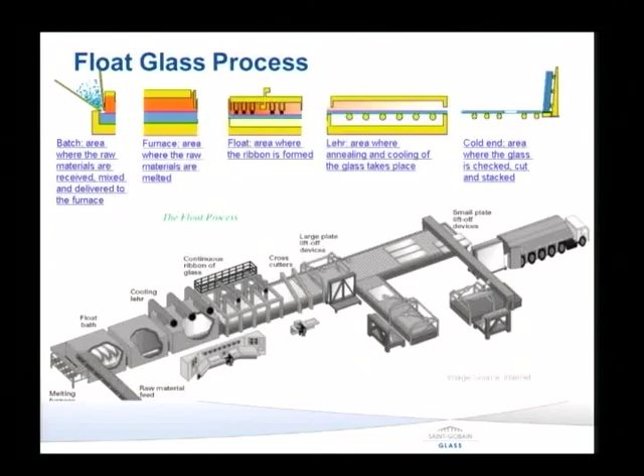The glass is floated over molten tin and a ribbon is formed because of the difference in densities. This ribbon is moved on to rollers in the annealing lehr. The annealing lehr is extremely long and can be as long as 400 meters. This is where the slow controlled cooling of the glass takes place. It begins at 600 degrees at the beginning of the lehr and goes down to 40 degrees centigrade. This moves on to the cold end, where the glass is cut, optimized, and then stacked.

Just about the raw materials that go into the manufacture of glass. Glass is fascinating as it uses more of earth materials, most of which is sand. Sand brings in silica, which is found up to 95 to 99% in normal occurring sand. Its melting temperature is 1750 degrees. The other raw materials are limestone, dolomite, soda ash, sodium sulfate, and coke.

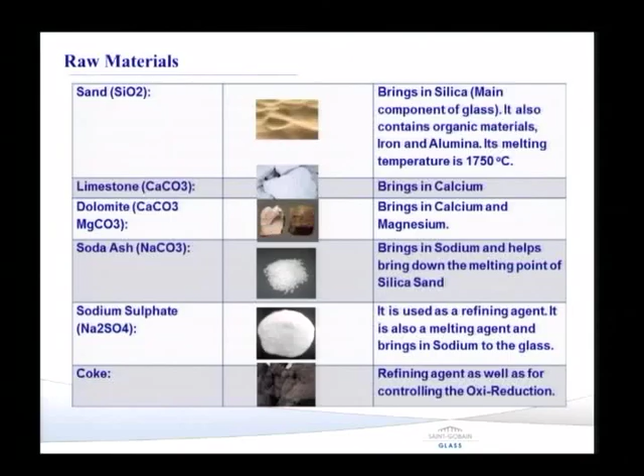Some of these are used as fluxes, and some are used as refining agents. These bring about calcium, magnesium, sodium, and carry out the oxy-reduction reaction in the furnace. You can understand this better if you look at the final composition of glass, which contains silica, calcium oxide, sodium oxide, alumina, magnesium, and potassium oxide in their respective compositions. Glass is a unique material which has the structure observed in a supercooled liquid, but exhibits the mechanical properties of a solid. More on these mechanical properties would be explained during the design of glass.

Why do we use glass in buildings? Why do we see glass everywhere today? Let's have a look at that now.

Glass has become indispensable to modern architecture. Why? One, it saves time. Glass is much faster in construction. You can do an area of 150 square meters in a single day.

It's a lighter material, so it saves resources, a sum of 1,300, which includes, for every 15 floors, about 500 in the brick material and the remaining 800 in the foundation removal and additions. So this saves resources. It's energy efficient.

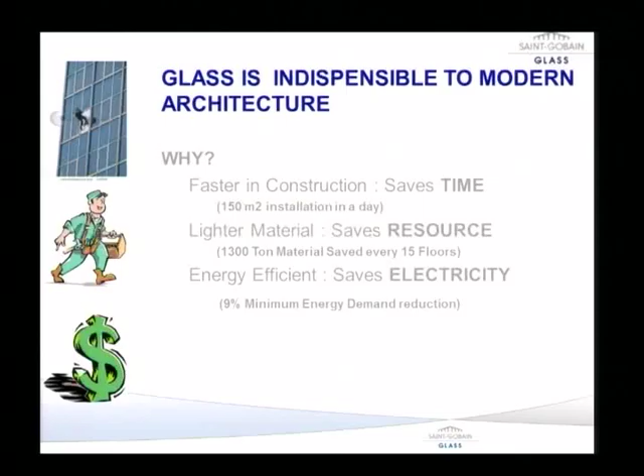A 9% minimum energy demand reduction is observed between buildings which use glass and those which do not use glass. Now this can go up to as much as 50% or even higher if you use glass effectively and carefully. We will touch upon this especially in the coming slides in this lecture.

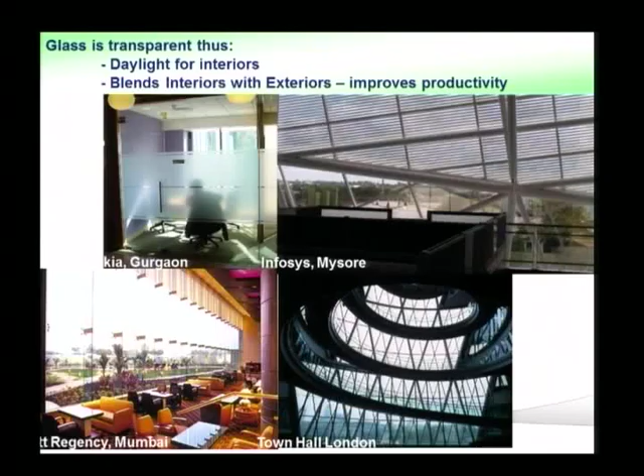Another unique property of glass is that it's transparent. It brings in daylight to the interiors and blends the interiors with the exteriors. This has also been seen to improve productivity as compared to the claustrophobic effect you get without windows. No other building material can effectively do this while being fully transparent as glass with such a high light transmission.

Just to show you some examples of buildings which combine natural and artificial lighting in these slides. And in the next slides, buildings which use only natural daylight through effective daylighting devices, as the picture you see on the right, and completely glazed windows which allow light inside but reject the heat transfer between the window.

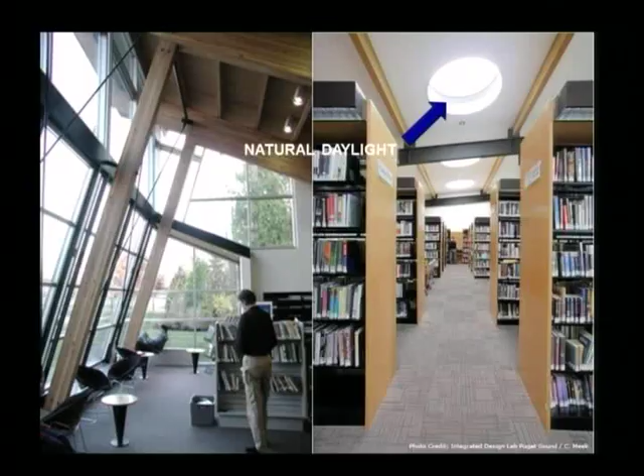Apart from that, glass is also recyclable, most of which is used in the manufacturing process itself and can be reused in the annealed condition, where it can be cut and reused again, or as full windows.

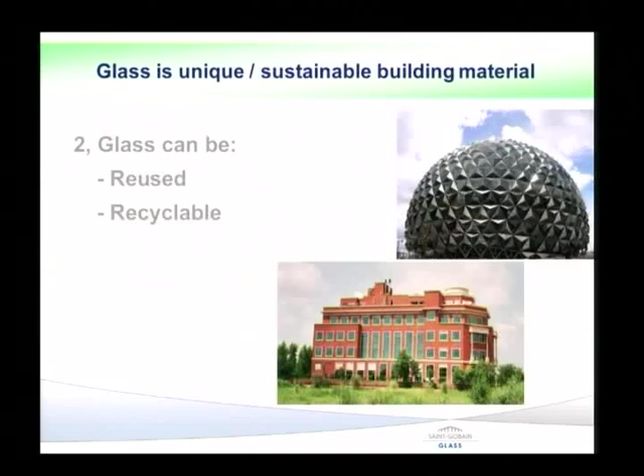Architecture. Let's see how glass plays a role in today's architecture, how glass has evolved over the days. If we look at modern architecture, you can divide them into generations.

In the first generation, windows were smaller, what we call punch windows, and glazing wasn't extensive. You move on to the second generation, the skyscrapers used fully glazed facades, wherein the entire character of the building was known through the glass.

In the third generation, transparency became more important, and glass was seen as a material that could give a sense of openness. The fourth generation was more about form, using the form of the building to actually provide function in terms of passive design in architecture.

The fifth generation, what we are moving towards, is communicating through the entire facade through glass, wherein you can actually use the glass to provide a function apart from its standard functions of transparency, heat reduction, and structural support. Let me show you some examples of the fifth generation, because this can be quite interesting.

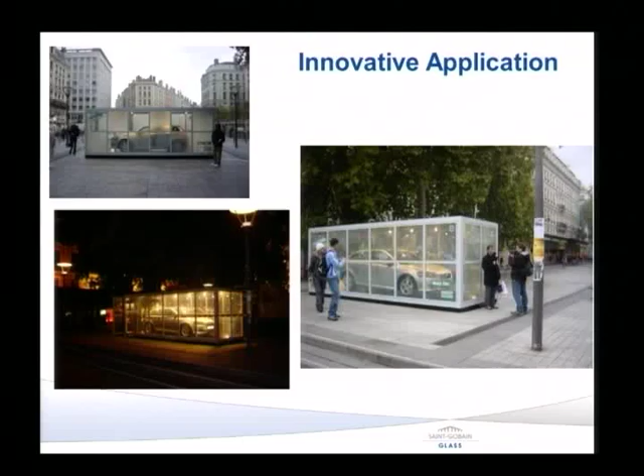Moving back, this is as forward as we can go in terms of using glass in buildings. Let's jump down to the basics. How do we use glass in buildings?

Basic glass can be clear, tinted or coated. A tinted glass runs a color through the thickness of the glass by adding colorants to the raw materials in the furnace, so you can get different colors through the thickness of the glass itself.

A further value addition is coating the glass. These form the base glass, which are further processed after being cut to size and made ready to go into the building as tempered, laminated, bent or curved.

There can be other decorative value additions done in this phase, such as a ceramic fret design on the glass, acid etching, or frosting. The applications are various and you would see these in day-to-day life.

The glass is transformed and made ready to go into the building, either as single glass units or insulated glass units. Insulated glass units are usually two or more glasses combined with a spacer and made into a single unit. This provides several benefits such as thermal insulation, acoustic insulation, etc.

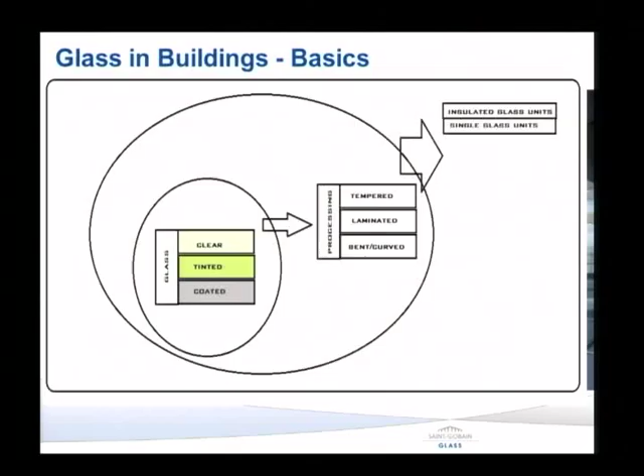Let's see the properties of glass. Glass has a very high compressive strength of almost 1000 megapascals. What it loses in tensile strength, it makes up in compressive strength. The tensile strength of glass is 40 megapascals, but can be improved by heat treatment.

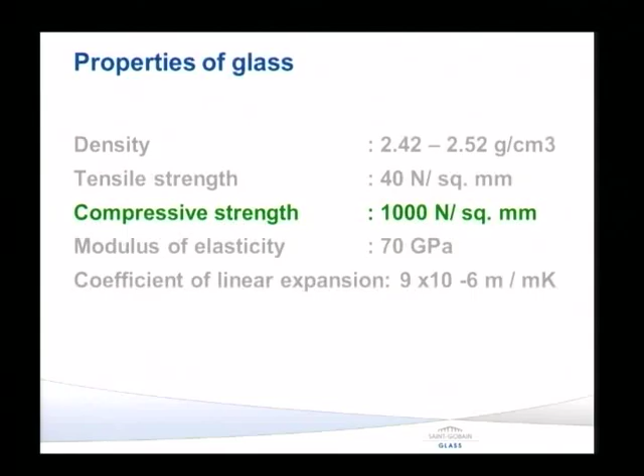This can be done by a process called tempering, which we will see in the coming slides. The glass itself can be improved from 40 to about 120 megapascals.

There are several ways of using glass. Let's look at two of the most common. One, it's used as an infill material where the role is to allow vision, and the glass carries the load and transfers it onto the structural members such as the frame.

This uses the plate and beam theory, like a slab, where the glass can be used even for flooring, for canopies, roofs, skylights, etc.

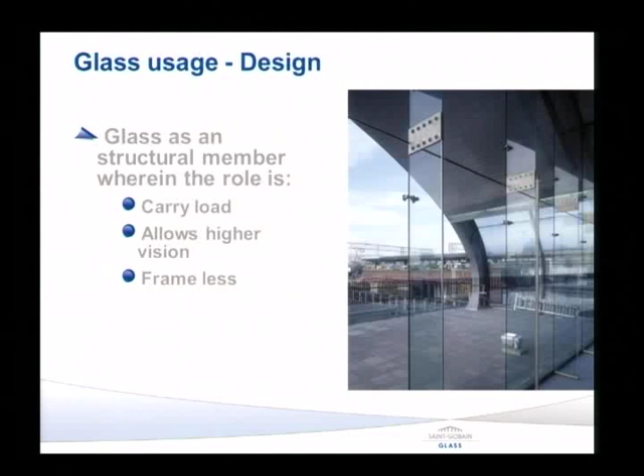The second is where the glass itself is a structural member. The glass carries the load and gives the illusion of being frameless because glass is transparent. You see this becoming more and more common today. Normally, we use finite element analysis to study this as a structural member.

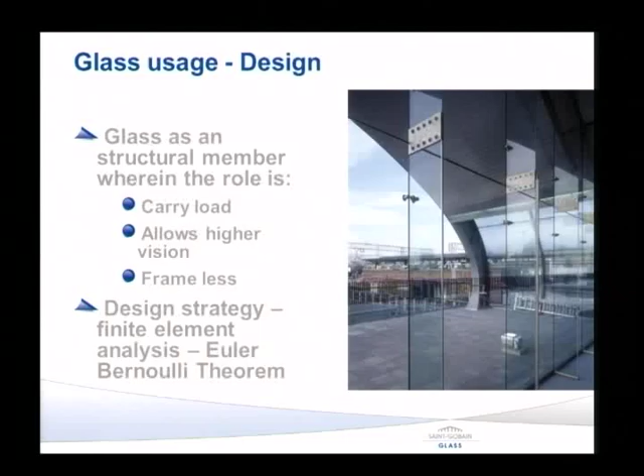Sustainability. How can glass be used as a sustainable material? Why do we see more and more buildings that are energy efficient claiming to use glass to actually reduce their energy consumption? This is quite interesting. Let's see how.

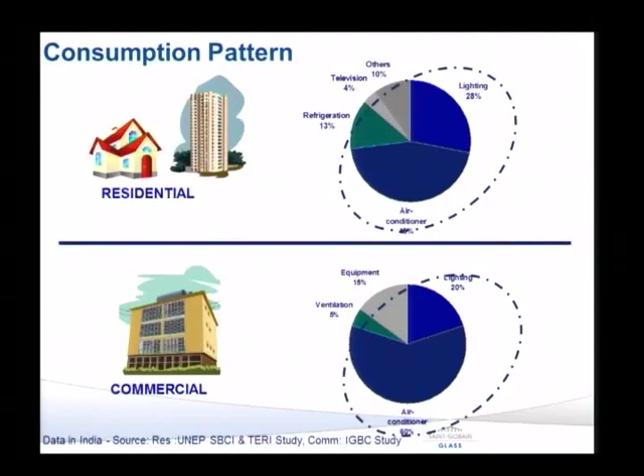If you look at total electricity consumption, about 30% of all electricity is consumed by buildings in most countries. Within buildings, you have residential and commercial broadly. Most of the electricity consumption comes from air conditioning and lighting, about 80% in both residential and commercial buildings.

Both of these are directly affected by the glass. Glass allows light and can reduce the amount of artificial lighting used in the building. Most of the heat load on the air conditioner comes from solar heat gains through the glass, which again can be controlled by choosing the right type of glass.

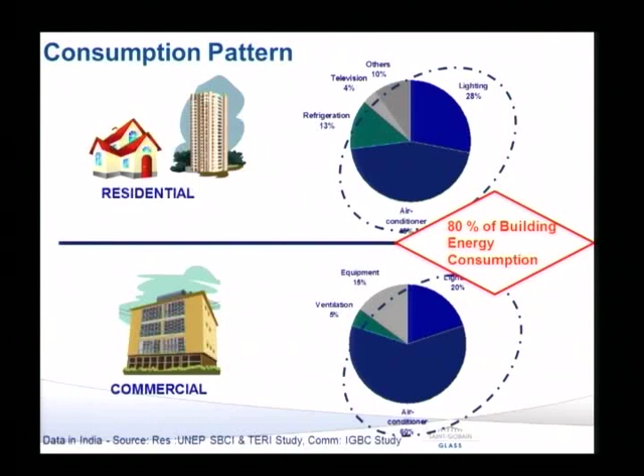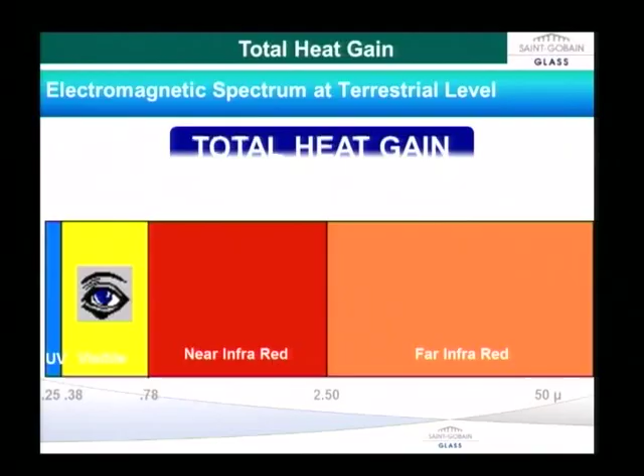It's important to understand the electromagnetic spectrum to see how heat enters through the glass. The useful part of the wavelength is between 380 to 780 nanometers - this is the visible part of the spectrum. This is what we want to cause vision, and we want this to enter the building.

Now, the near infrared and the far infrared are heat-causing radiation. Most of the near infrared comes directly from solar radiation. The far infrared comes from heated objects and surroundings outside the building, which are then transferred through the glass into the building.

There's also the ultraviolet part of the spectrum, which can cause fading of furniture, curtains, etc. in the interiors, and is also known to be carcinogenic or cancer causing. So of the total electromagnetic spectrum, the part that we want is only the visible part of the spectrum.

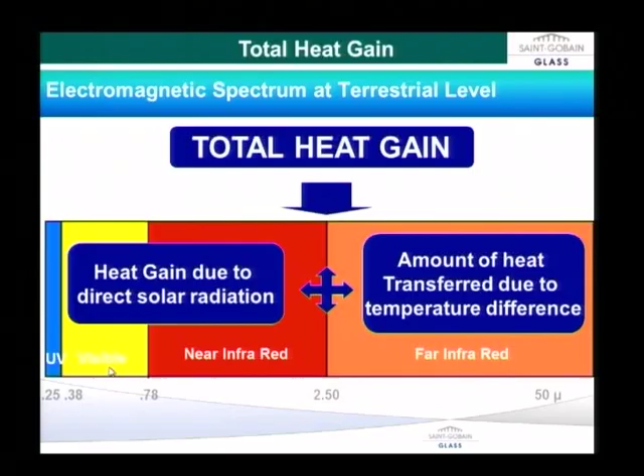To understand thermal transmission better, it's important to understand the parameter of U value. What is U value? It is basically a coefficient of heat transfer. It is the amount of heat transferred due to the temperature difference on the two sides of the glass. How do we define U value?

If you take a glass of 1 square meter, for a 1 degree difference in temperature, this could be 21 outside, 20 inside, how much heat actually enters the building? How many watts of heat comes through the building? So let's say, for example, it's 30 degrees outside and 20 degrees inside. So your U value will give you the amount of heat coming inside.

Can we just stop here and shall I explain it on the board? Because it can be written down quickly. Yeah? Where's the... and I think I need to wipe my face. No? Any chalk?

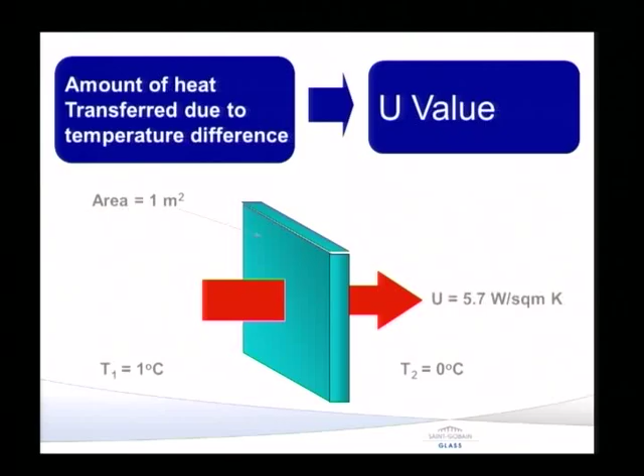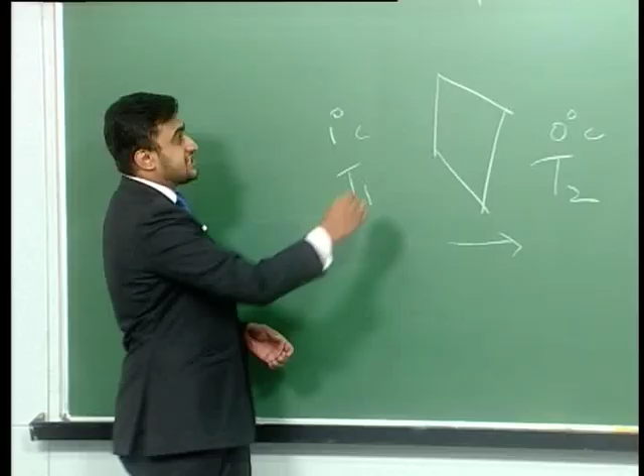The U value of glass, just to explain to you better on a board. If this is a panel of glass and you have two different temperatures on the exterior and the interior, the amount of heat transfer that occurs through the glass can be defined by your U value. So if you have a 1 degree difference in temperature for a 6 mm glass, about 5.7 watts pass through the glass.

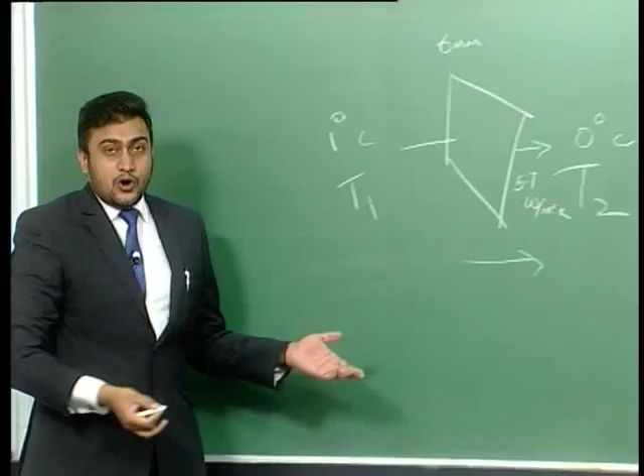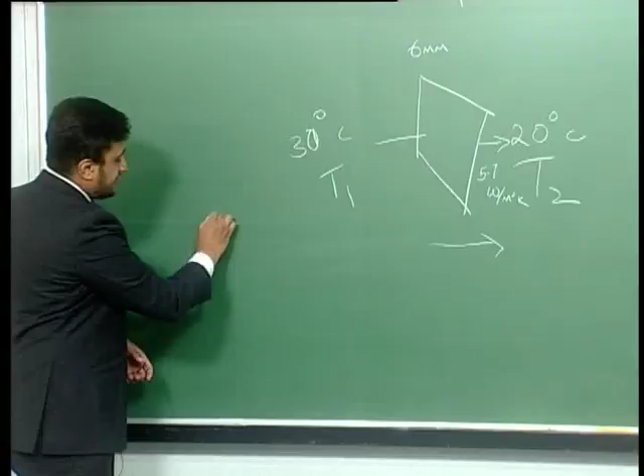Now let's say you have a temperature difference of 10 degrees. The amount of heat transfer is given by the equation for the heat transfer. So you have the area, it's 1 square meter, the temperature difference is 10 degrees delta, and the U value of 5.7. So you get 57 watts. Now this can be reduced by different measures. One is by doing a coating on the glass, we'll see how later.

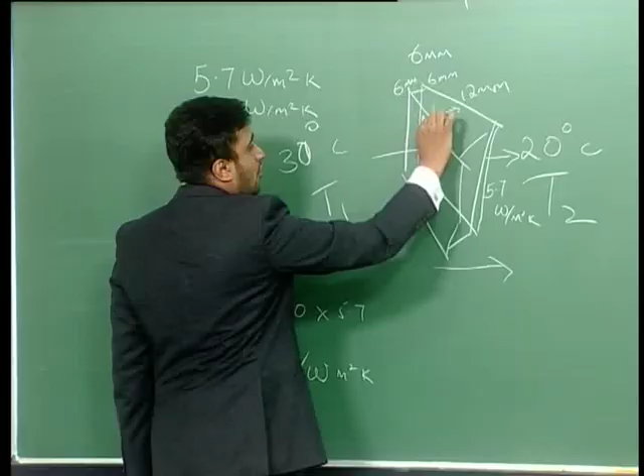Another is by making the glass into a double glazed unit. So you have an air gap of 12 mm and you have 2 panes of glass. A 6 mm glass would reduce from 5.7 watts per square meter Kelvin to 2.8 watts per square meter Kelvin just by using a double glazing. This can be further improved by doing a coating on the glass. Once a low emissive coating is done, this can go down to 1.5 watts per square meter Kelvin.

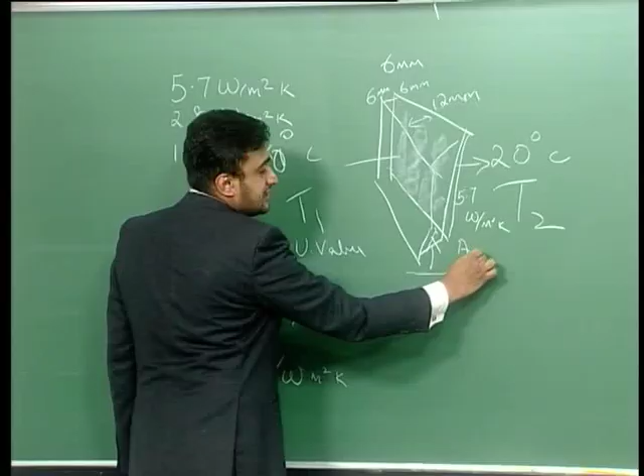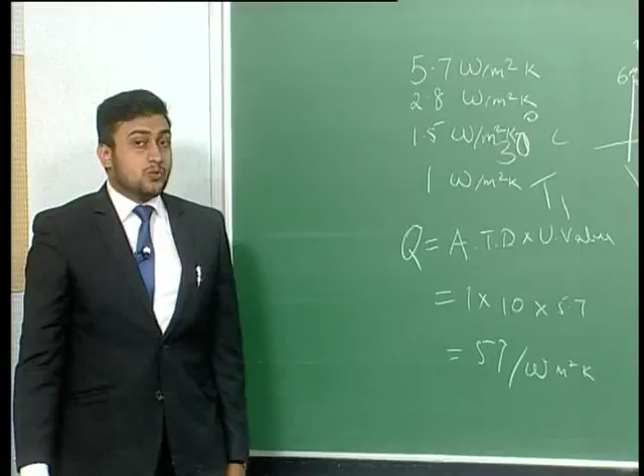This can be further improved by replacing the air inside with an inert gas such as argon, which would further improve it to about 1 watt per square meter Kelvin. Now in this case the 57, if you had used this, would come down to 10 watts.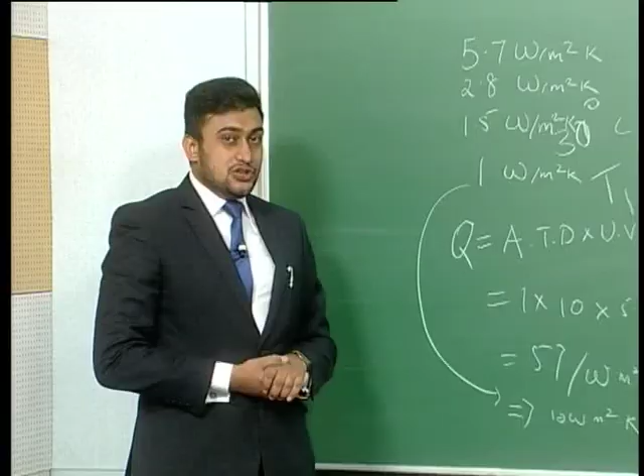Now this is very important in cold climates where people use heat to actually heat up the interiors, and you don't want that heat to be transferred outside. So let's say it's 25 degrees inside and 0 degrees outside, you have a 25 degree difference in temperature. So most of the heat generated would be lost if the U value of glass is very high. So it's very important to use a low U value glass in colder climates.

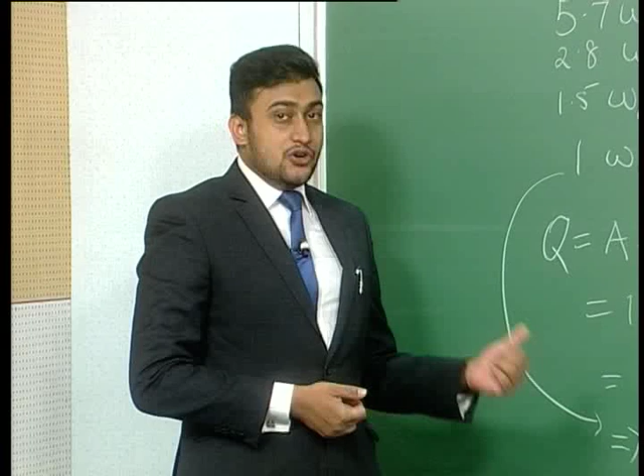In a very hot climate where the temperature can go up to 40 or 45 degrees during the day, the U value again becomes important. But if you look at a region like India, most parts of India at least, most of the heat gain is through solar heat gain; the amount of heat that is transferred directly through radiation is much higher. Let's look at that now.

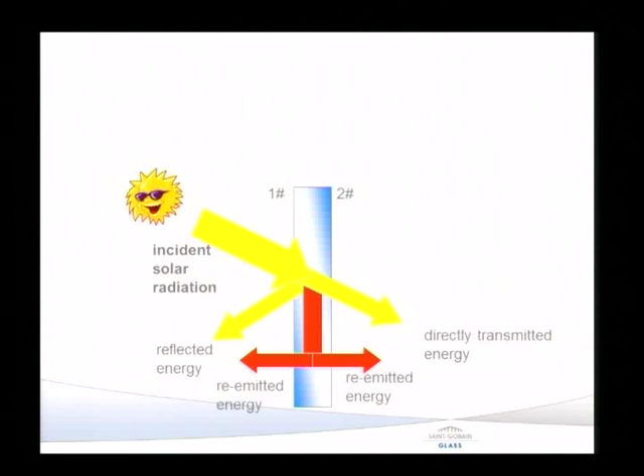So how does heat enter through a glass? From the incident solar radiation, a part of the heat causing radiation is directly transmitted through the glass itself. A part of it is reflected, a portion is absorbed by the glass, of which one part is re-emitted inside and a part is re-emitted outside. Now the part which concerns the performance of the building is that which comes inside the building.

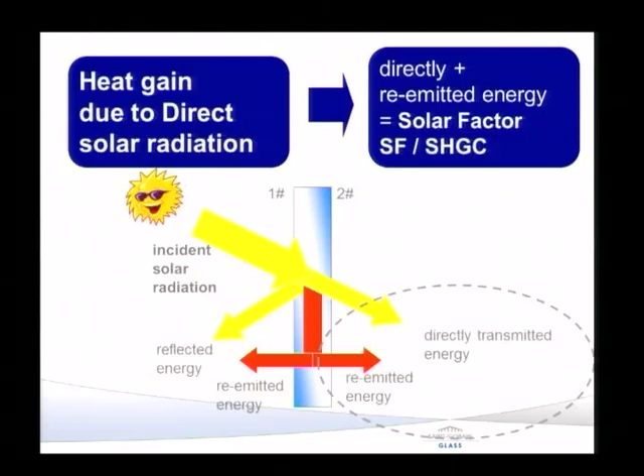So your solar factor, the performance parameter which tells you how much solar radiation is coming in, is the directly transmitted energy and the re-emitted energy compared to the amount of incident solar radiation. In some countries, this is also referred to as a G value. Let's see how this affects a building.

Consider an average summer day where it's 38 degrees outside and 23 degrees inside, a temperature differential of 15 degrees. The solar incident energy at around noon is about 630 watts per square meter. This can go much higher. Let's consider a clear glass with a solar factor of 0.83 and a U value of 5.8.

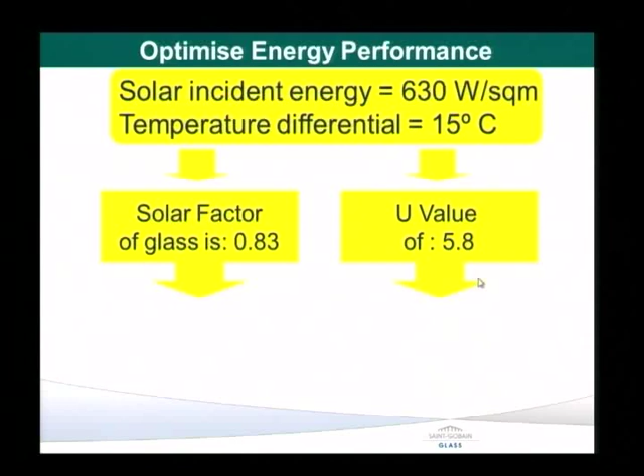Now the amount of heat coming in through radiation would be the solar factor into the solar incident energy. That's 0.83 multiplied by 630 watts, which is 523 watts. The U value into the temperature differential gives you the amount of heat that comes in because of the temperature differential. Now what can be controlled more easily is of course the solar incident radiation by using a solar control glass. So in a tropical country, a majority portion of the heat comes from solar incident energy and needs to

be controlled. Now say we used a glass with a solar factor of 0.5 instead of the 0.83. The amount of heat coming in would have been 315 watts and the total heat gain would have been less than 400 watts. Say we used an even lower solar factor of 0.2. The total heat coming through the glass would be further reduced to 126 watts and the total heat gain would be much lesser at approximately 200 watts per square meter. So it's easier to control the performance in a tropical country by controlling the solar factor of the glass.

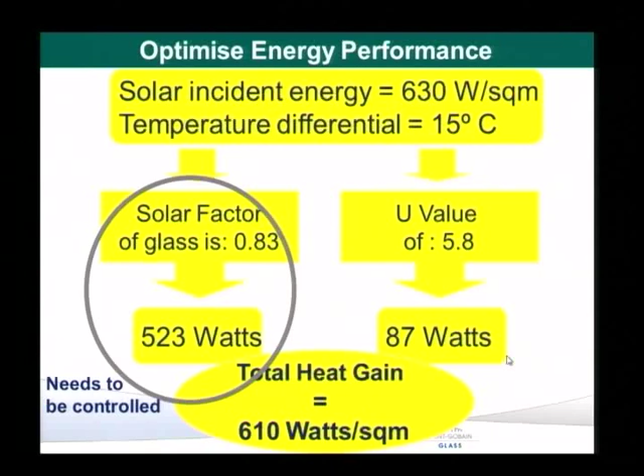Moving on to the other parameter of glass, light transmission. Now this is a desirable quality to have light inside the building, but then again too much light can be a hindrance to vision and cause glare. On a sunny day you can get around 100,000 lux of light outside the building. Even under the shade of a tree on a cloudy day, the lux level goes down to around 10,000 to 9,000 lux.

Whereas your light required for working is only 500 lux. Although we have so much abundant light outside, we end up using artificial lighting for this 500 lux. So it's important to use glass effectively to optimize the amount of light coming in so that the light becomes usable by using an optimum light transmission.

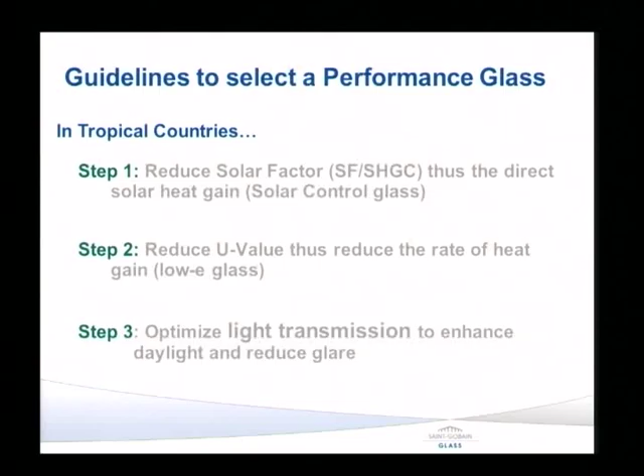So the guidelines to selecting a performance glass with reference to tropical countries would be: step 1, reduce the solar heat gain by using a low solar factor or low solar heat gain coefficient glass. Step 2 would be to reduce your U value and thus reduce the rate of heat gain, improve the night performance, and in the case of very hot climates to improve the overall performance. Step number 3 would be to optimize light transmission to enhance daylight and reduce the amount of glare within the building.

How are these performances achieved? These are achieved by coating on glass, as mentioned earlier. Now there are two types of coating technologies. One is the online coating and the other is offline coating. The online coating is the older technology which has been in practice for several decades now. The offline coating is a much newer process, and the performance that can be achieved by this type of coating is much better as compared to the online coating.

Now in the online coating, the coating is done as the glass is manufactured. So as the glass is leaving the float bath, a coating is done at 600 degrees over the glass by passing a gas over the glass. So this, through the process of pyrolysis, forms a coating on the glass. The newer process is the magnetron process, where the glass is sputter coated in a separate chamber. Let me explain this process on the board.

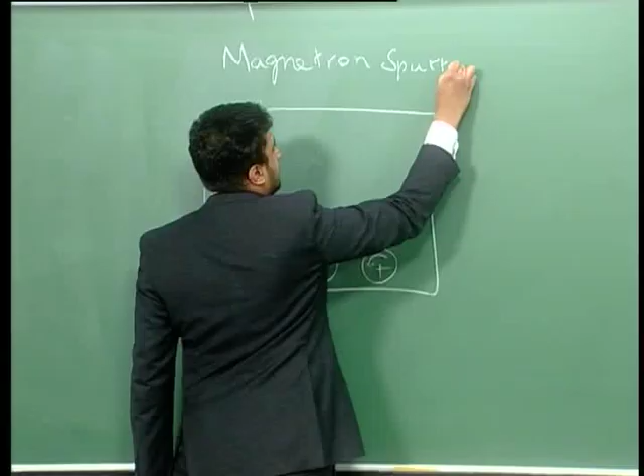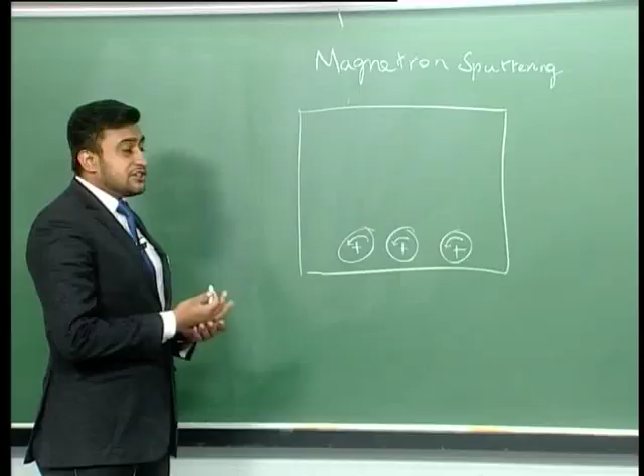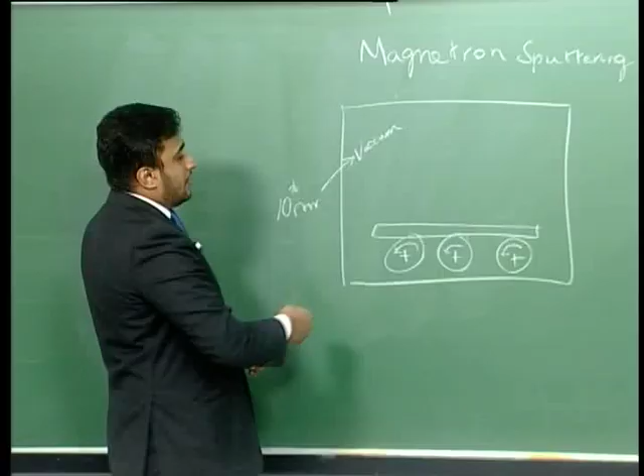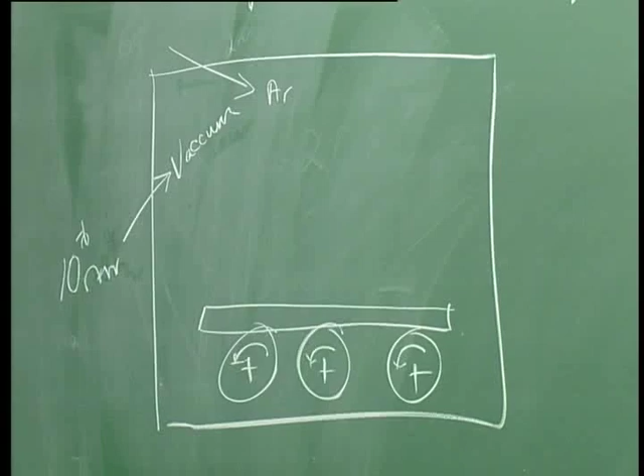The magnetron sputtering process. Now this is done in a separate chamber called a magnetron coater. This is one such chamber in a magnetron coating line. The number of coating magnetron chambers can be up to 42 or even higher in some cases. Over here, the glass moves over rollers in a very high vacuum environment. The vacuum can be as high as 10 to the power minus 6 torr. After this, a process gas is introduced within the chamber. Argon is the most commonly used gas because of its high mass density.

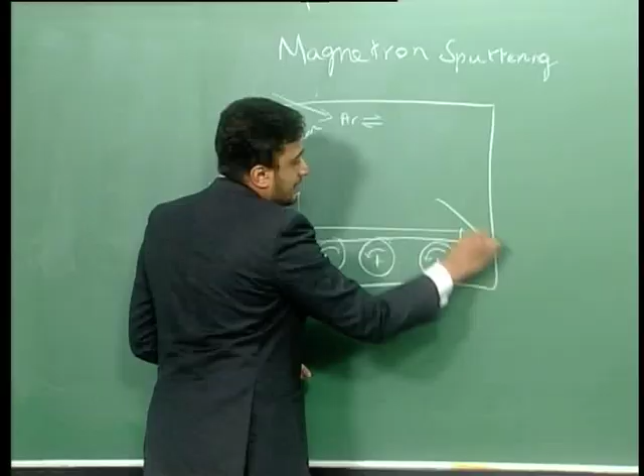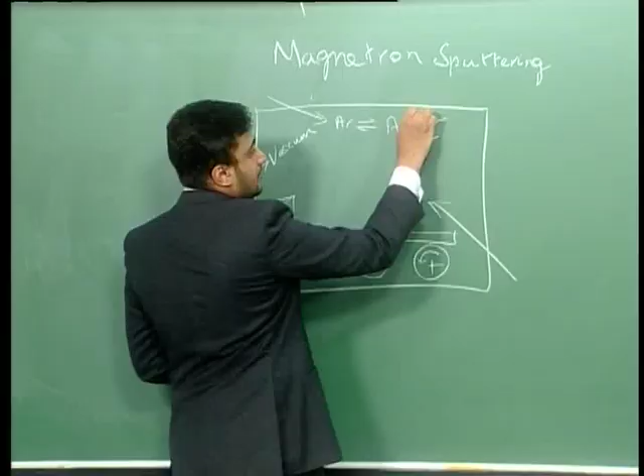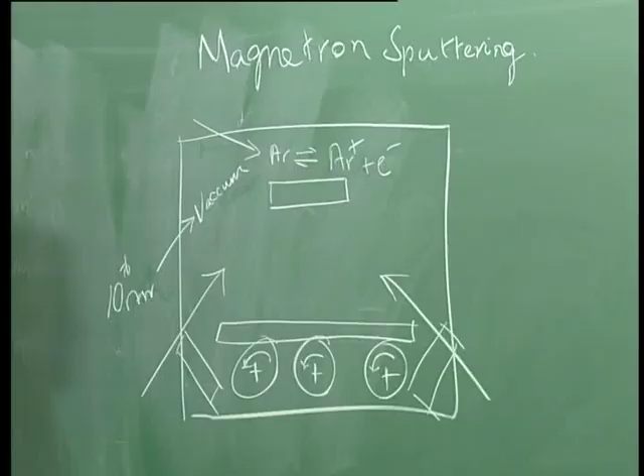An electric potential is applied within the chamber and the argon gets ionized to form one free electron. Using electromagnets, the argon can be controlled. This is when the target material that has to be coated on the glass becomes important to explain.

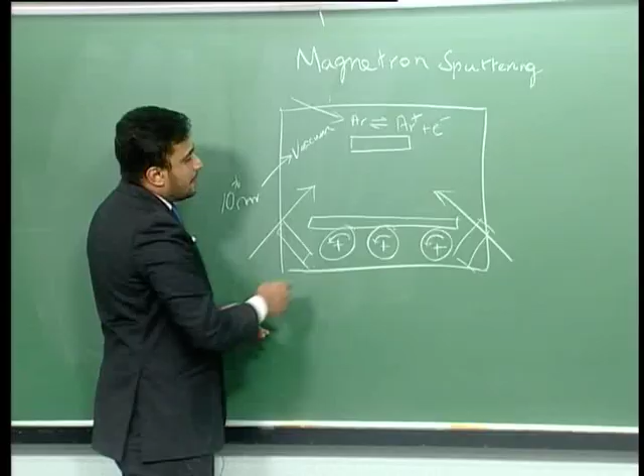Now, an engineering coating on the glass can be of several layers. Each of these layers is done in a separate chamber. Each chamber has a target material to create what is called a coating stack. This coating stack can be engineered to give you any performance in the glass.

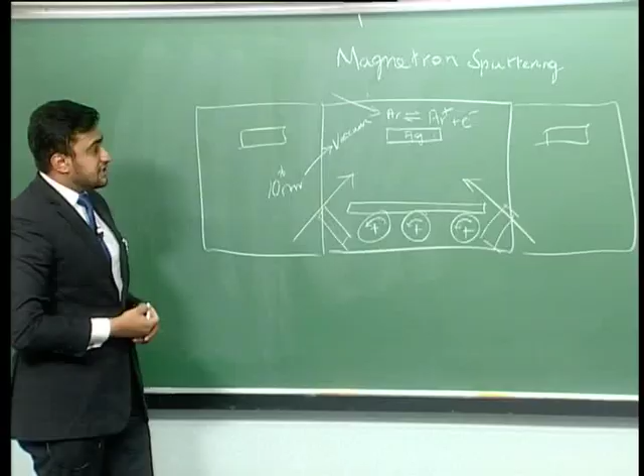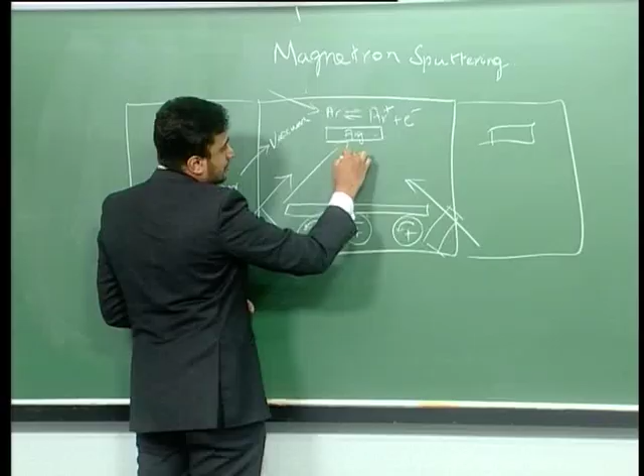Let's take, for example, the target material is silver. Silver creates a low emissive coating on the glass. What happens within the chamber is the electromagnet directs the argon towards the target material, causing the target material to sputter on the glass. Now this creates a nanometric coating on the glass.

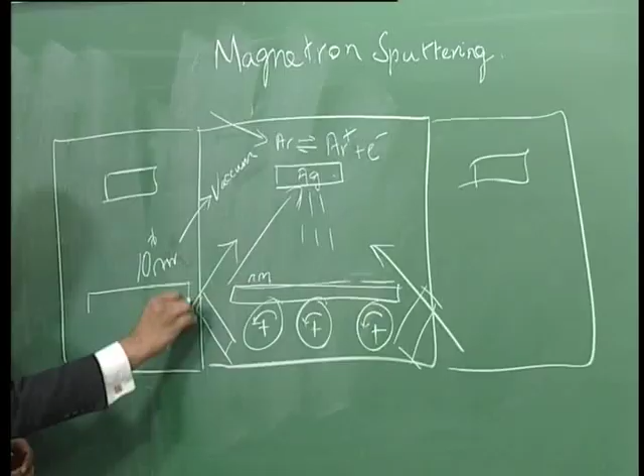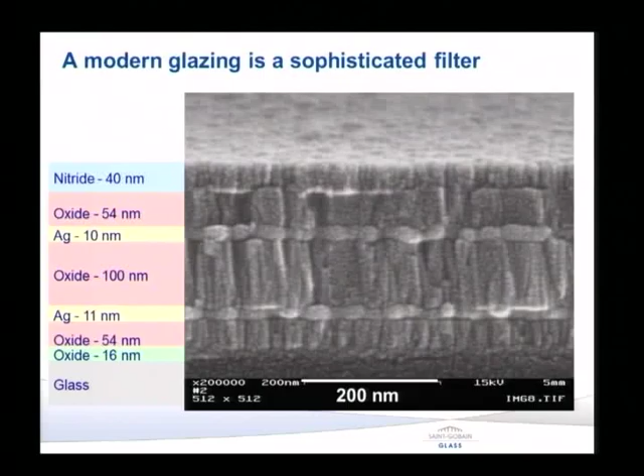The performance can be better understood if we compare it with the online coating. Now, in the online coating, a single gas was passed over the glass, which forms a single layer of coating. What happens is you have a light transmission of 29, a solar factor of 0.42, which means about 42% of the heat was coming in, and in a double glazing you get a U value of 2.8.

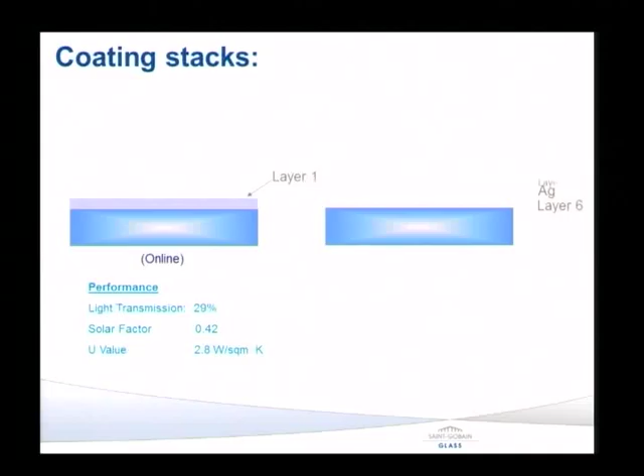If you move to an offline coating, the number of layers increases, so you can actually get a much better performance. So it uses some simple concepts of nanotechnology, such as coating silver. If we had coated silver in a micron thickness, it would have acted like a mirror, whereas if you coat it in its nanometric thickness, the properties change. It allows light to pass through but rejects the heat.

Look at the performance of this glass. The desired quality of light transmission is much higher. The solar factor is much lower. In fact, you have about twice the amount of light coming in as compared to the heat, and the U value also reduces. So you get a much better performance by doing an offline coating.

Let's see the impact of this in an actual building. How does this affect the energy consumption of the building? This was a study done in Colombo in a building with a facade in the west orientation. Using a clear float was the base case, where you have around 180 units of electricity per square meter per year.

Using different performance glasses, using just a low E, the electricity consumption reduces by about 15%, and by using a spectrally selective glass like the one shown to you on the previous slide, the HVAC and lighting consumption can be reduced as much as 66%. Now this directly converts into savings in money and in energy, contributing to both your wallet and the environment.

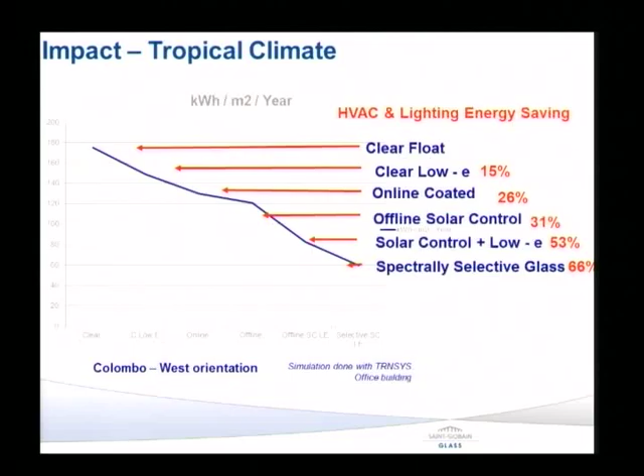Safety. Let's talk about safety now. Right from when we were children, we were always told when we handle glass to be careful. Let's see how to be careful with glass when it comes to buildings. Now there's safety and there's security.

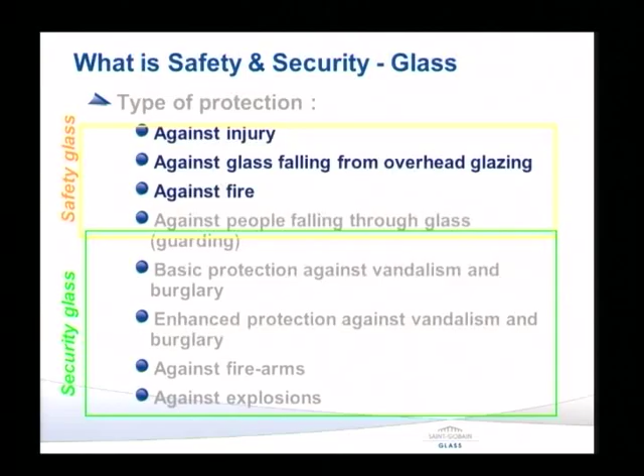Safety is the more basic, against injury, against glass falling from overhead glazing, against fire. Safety is what should be there at all times and is mandated by several building codes. Now moving ahead is security. Protecting against vandalism and burglary, protecting against explosions, bullets, bomb blasts are all considered as security glass. Let's look at safety glass.

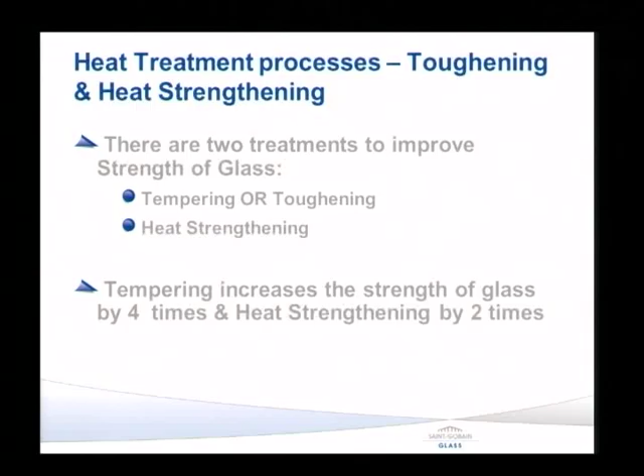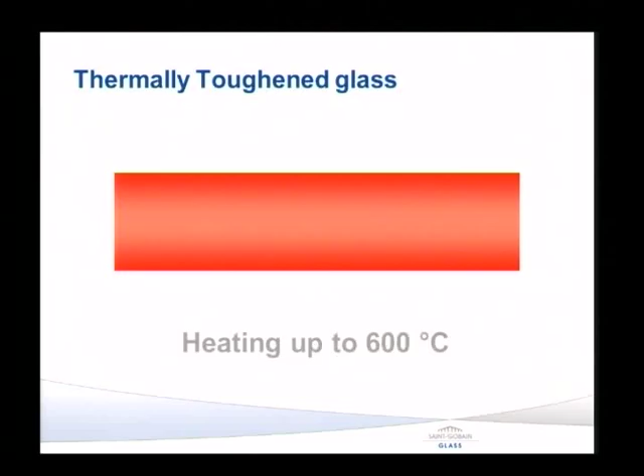Tempering is done in a separate furnace where the glass is heated back to its molten state at 600 degrees centigrade. Now instead of cooling it in the normal process where it's cooled very slowly, the glass is cooled by forced convection using blowers. So the glass on the surface cools faster than the core. This results in a rearrangement of the layers within the glass. You get a much thicker layer of compression towards the edges of the glass.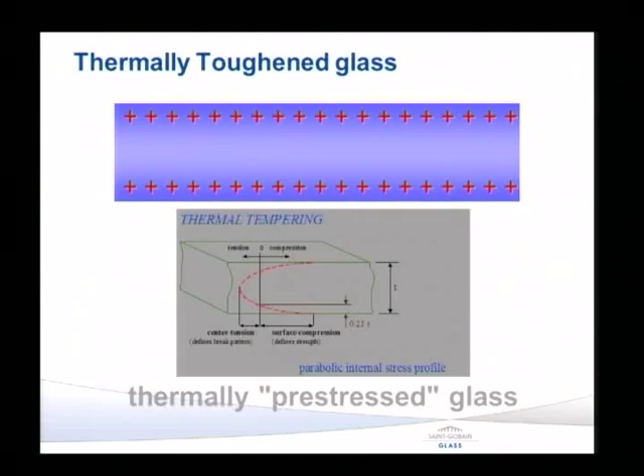This creates pre-stressed glass which can withstand a much higher load, but when broken shatters into tiny fragments. The advantage of these tiny fragments is that they are harmless. These can be taken even in your hand without the possibility of being cut, as was the case in annealed glass.

Tempered glass is very common. You would have seen these quite often in automotive applications, where the side windows of your car use this type of glass, and in the case of an accident you might even see these pieces on a road.

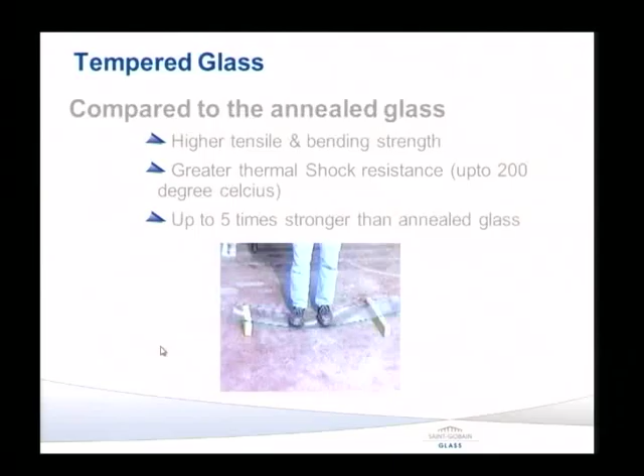When you compare it with annealed glass, it has a much higher tensile and bending strength. It is much more thermally shock resistant and can even be up to 5 times stronger than annealed glass. In the picture you can see a man standing on a tempered glass pane just to show you the strength. I would recommend you don't do this at home.

Another type of processing which is similar to the tempering, just to introduce it to you now, is the curved and bent glass. When the glass is heated up to 600 degrees, it can be molded on frames or pallets and then be bent and toughened.

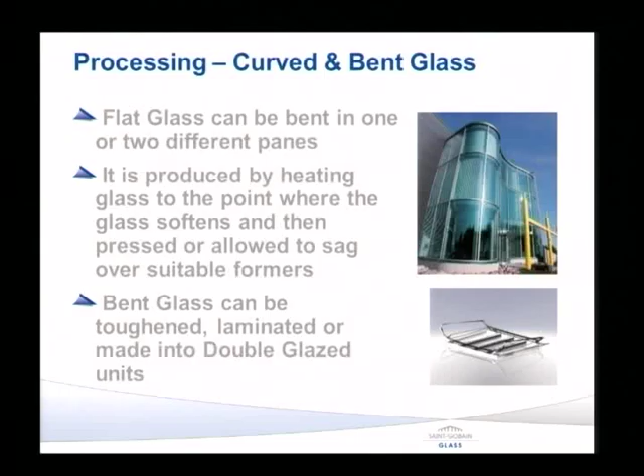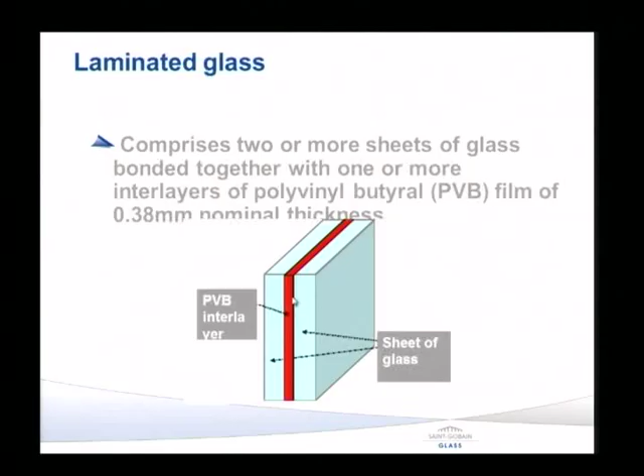Let's move on to laminated glass, the other type of safety glass. You would have seen laminated glass in the front windscreen of automobiles, wherein the glass has to be laminated by standard. What is laminated glass? It comprises 2 or more sheets of glass bonded by a layer of polyvinyl butyral. Usually polyvinyl butyral comes in a thickness of 0.38 and can be used in 1 or more layers.

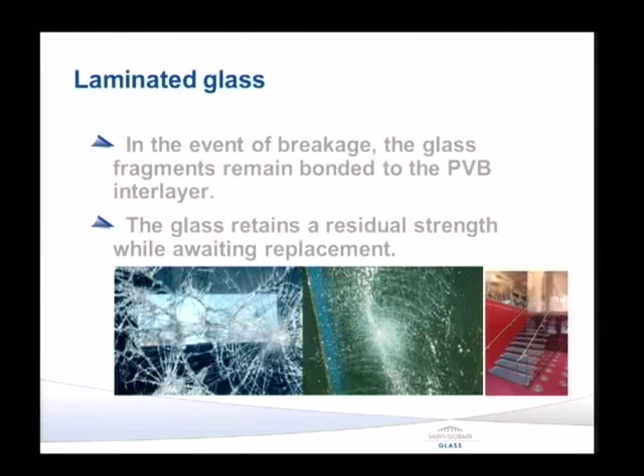In the event of a breakage, the glass, even though it's broken, remains integrated with the polyvinyl butyral, and the glass retains a residual strength until it's replaced. This avoids the possibility of glass shattering and falling on people. So it is recommended in the case of inclined glass, glass floors, staircases and roofs. It's also used in guarding applications.

Another important quality of laminated glass is that it's used in acoustics to reduce the amount of noise that enters your building. For example, if you're designing a hotel close to the airport, it is supremely important to reduce the noise through your windows. In this case, laminated glass helps reduce the amount of noise coming in. Apart from that, multiple layers of lamination can help with bulletproofing and bomb-proofing your windows.

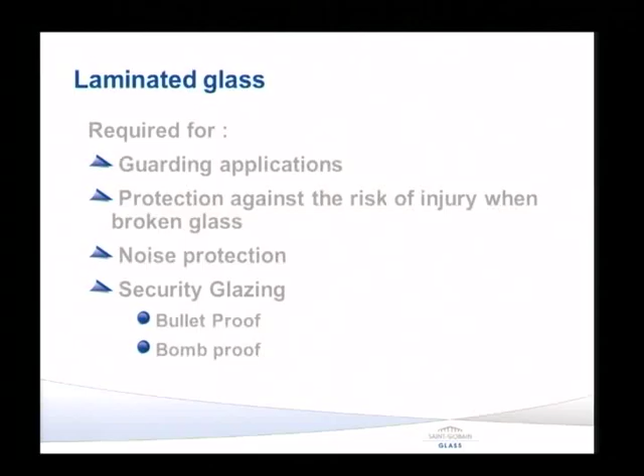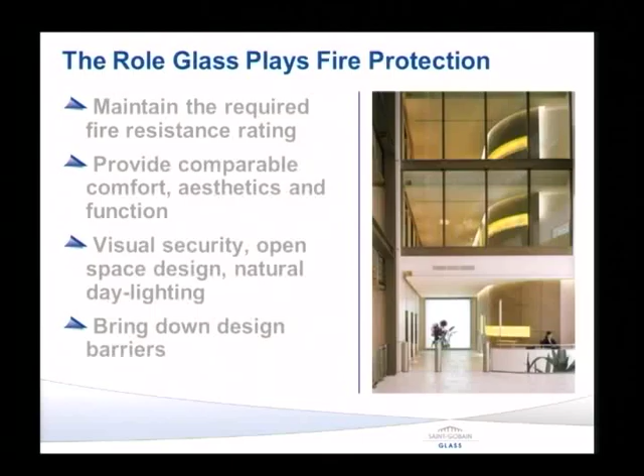The next type of safety glass is fire-rated glass. You would have seen earlier fire-rated doors and windows are usually fully metal doors with a tiny little window, usually with wired glass. But today you can have fully glass windows, doors, partitions which are fire rated. The main goals of fire protection are life safety, property protection, and continuity of operations.

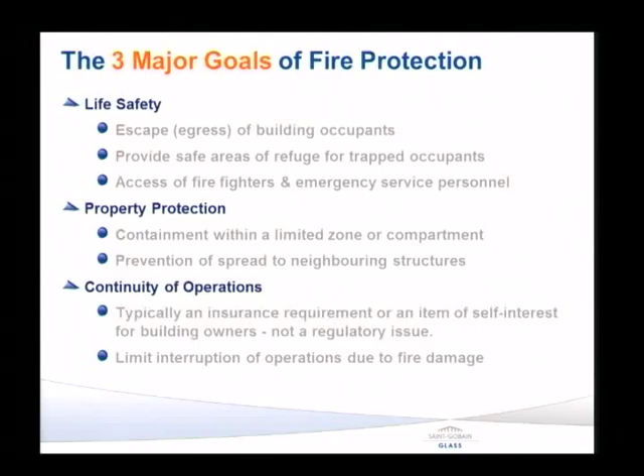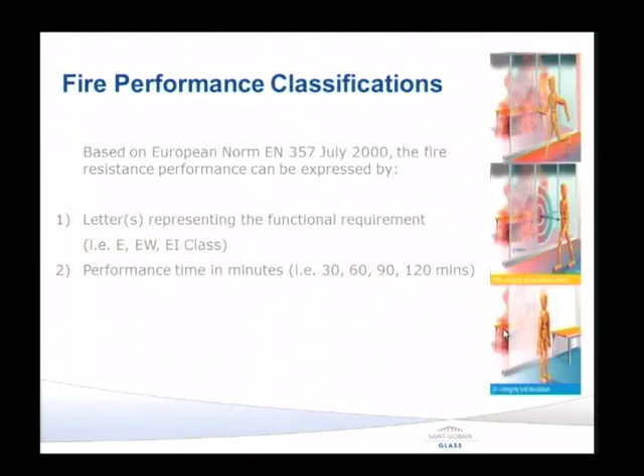Based on this, glass can provide protection as much as 120 minutes, stopping not only the radiation but also providing insulation, which means you can even stand next to a room where there is a fire. Just to show you some examples of fire-rated doors.

Let us summarize what we have seen today. Glass is light. It's not only a light building material, it also allows light into your building. Glass is space. It can create visual connections between rooms and between your exterior and interior. Glass is strength. It has a very high compressive strength, and the tensile strength can be increased by doing heat processing.

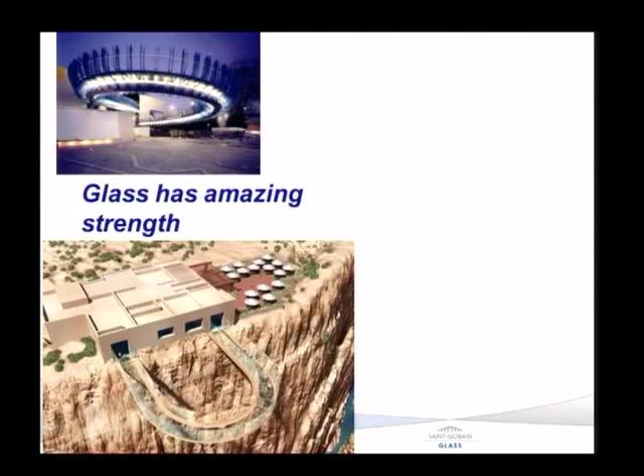Glass has amazing strength. An example here of a skywalk on the Grand Canyon. With glass, you can achieve amazing complexity. Glass is the modern concrete.